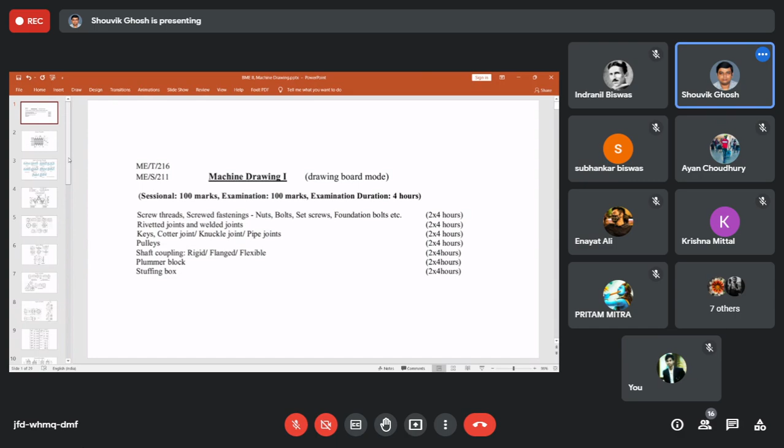So in our joints topic, as you can see, we have riveted joints and welded joints initially. Afterwards, we learn about keys and how keys are used to make a cotter joint, knuckle joint, and finally we have pipe joints. Okay, so we'll begin with riveted joints today.

So as you can see, in a riveted joint, as most of you might have seen while crossing the Howrah Bridge or any bridge that is prepared by using riveted joints, you will see that on both sides of the metallic sheet or the metallic plate, you will find round shaped bolts that are present. How these bolts are made is the process called riveting. Okay, the bolts look like this, with a round head on one side and a shank.

Now you can see on the right hand side face how the rivet is made. You can see this round cup like die. It is pressed using a high amount of force on the other side of the shank, such that the metal deforms and creates a cup like structure or the half cylindrical structure on the other side as well. So both the sides are sealed with a single piece of metal having a cylindrical structure at the center and two semi spherical structures on both the ends. Okay.

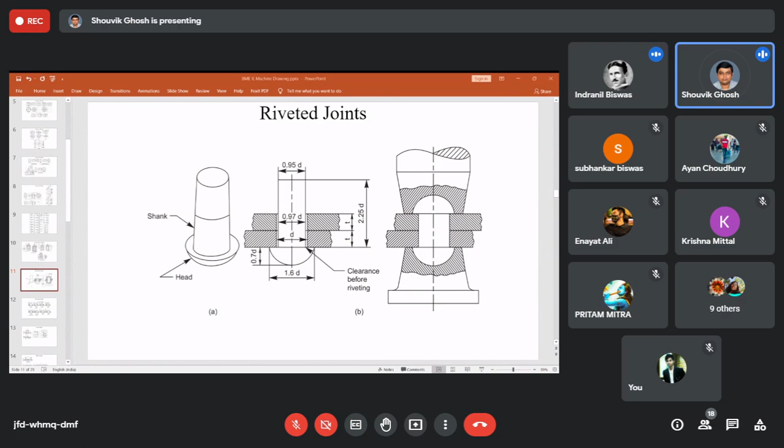All these have different utilization in industries. In most of the cases, you will see that the cylindrical portion is similar to each other, only the actual head is different in size, and based on that the naming of the type of the rivet is kept.

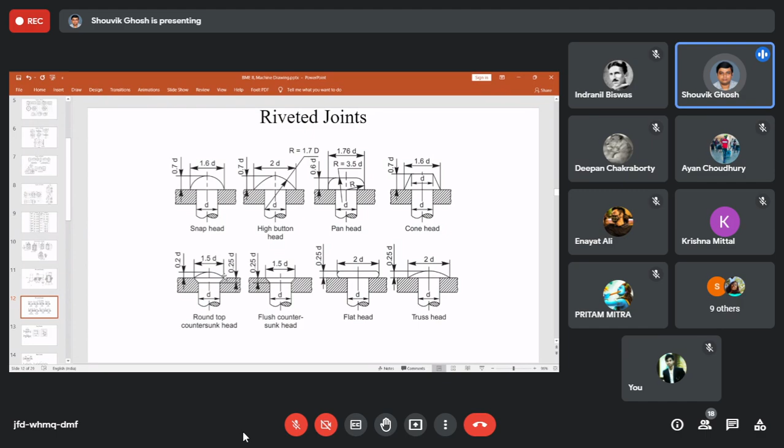In some cases, you can see countersunk head. It is somewhat within the material. An angular structure is present, and within that structure also some amount of riveting material is present, where apart from the cylindrical structure, the angular portion of this particular countersunk head helps in carrying the load or stresses present on the rivet.

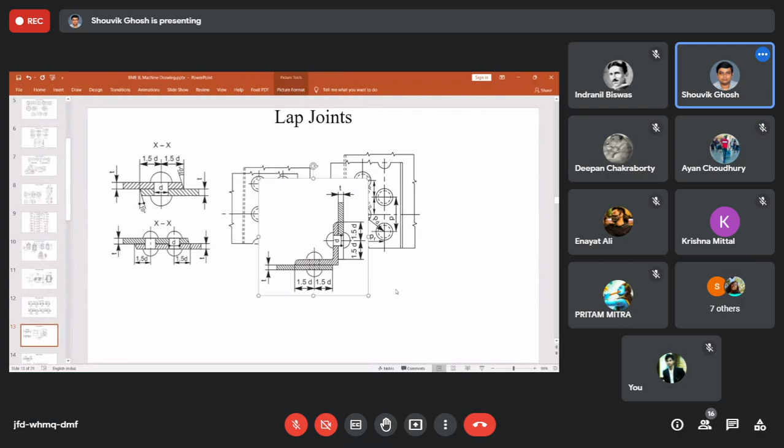Angle means, what we can say, this one. You have done I beam, L beam, T beam, right? So the corner of that, this is the I beam or whatever T beam. If the T beam is attached using riveted joint by overlapping, then this particular type of joint is called angle

joint. Okay, this particular joint is called angle joint, where a particular beam is used to attach two separate sheets of metal at 90° to each other. So that is the lap joint. Okay.

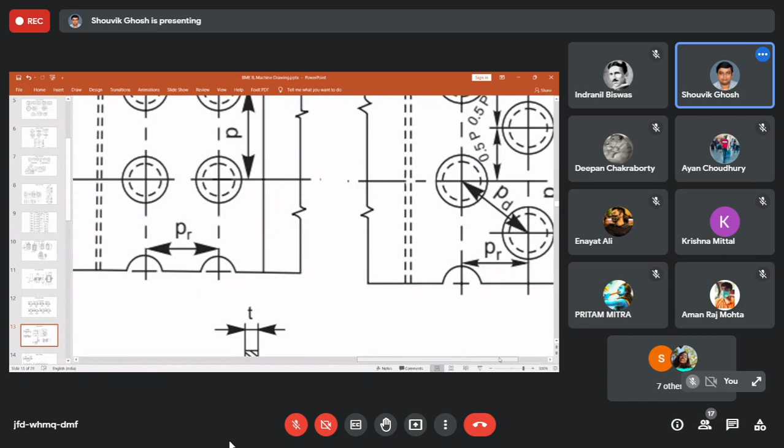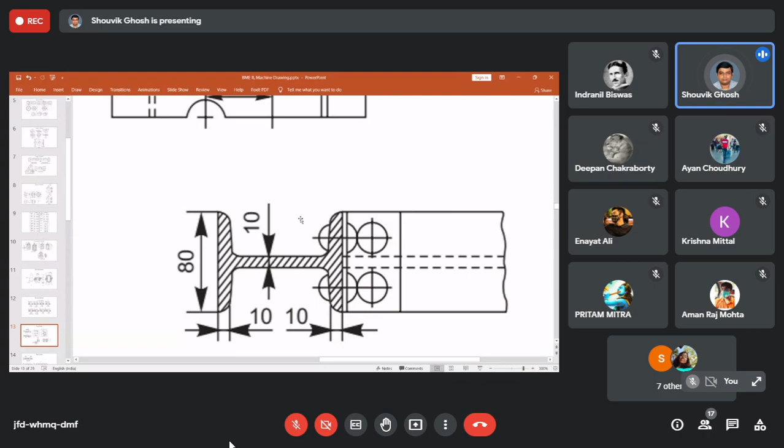This is the column or beam joint that you see in most of the bridges or any other fixtures. Next is butt joint. Butt joint comes from the term where two ends of a metal sheet are joined together using another strap of metal.

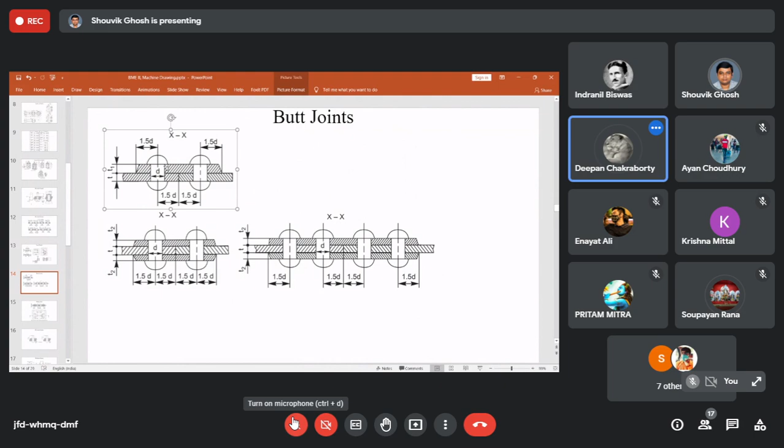So this particular figure on the left hand top side, these two metal sheets at the bottom are two ends of two separate metal sheets. You can see a cut in the middle, and the difference in hatching line angle indicates that these are two separate sheets of metal. So these two sheets are joined with the help of another strap of metal sheet into a single sheet of metal. This is called a single strap butt joint.

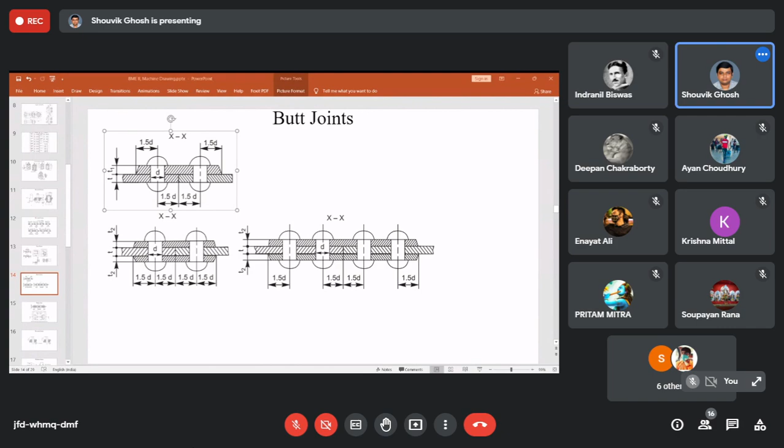Single strap butt joint. If there are two sets of metal pieces used, one on the top, one on the bottom, that means two ends of two separate metal sheets are joined using two separate straps of metal, then it is called double strap butt joint. Clear? Yes. Yes, sir. Okay.

Again, you can see a figure on this side. There are two sets of metal sheets, two sets of straps, two sets of rivets, two sets of joints. You can see two sets on the left, two sets on the right. This is double strap, double riveted butt joint. Okay. Do you want me to write the names?

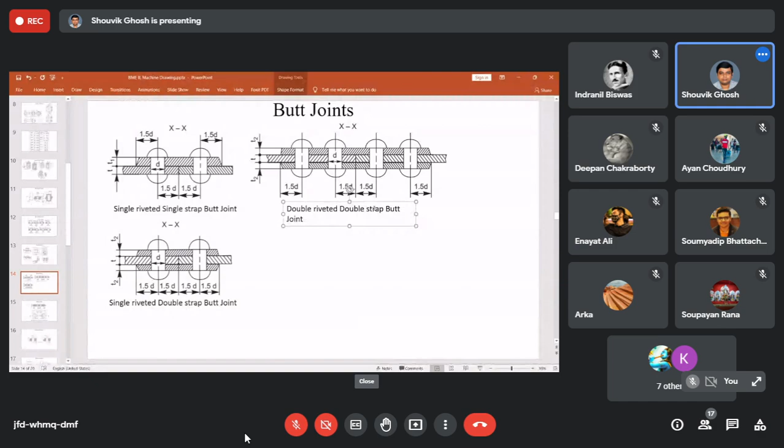Single riveted single strap butt joint. Yes. So single riveted single strap butt joint, single riveted double strap butt joint, double riveted double strap butt joint. Okay, so these are the three types of butt joint.

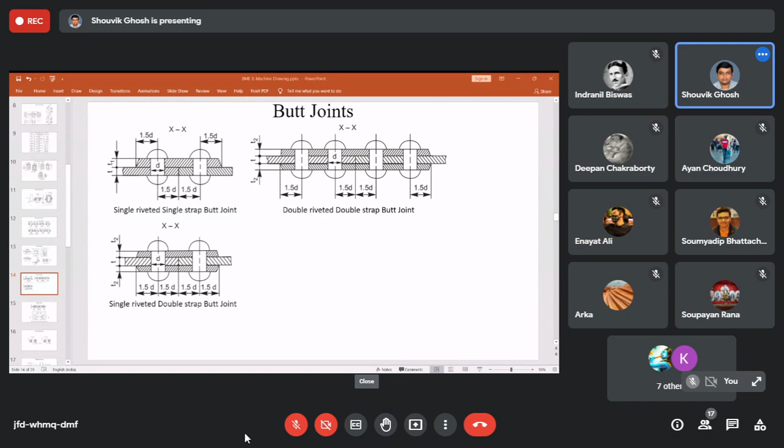This, since তোমরা মেকানিক্যাল থেকে, I expect you can tell me a difference between these two. These two are similar images, but what is the difference? Can anyone tell me?

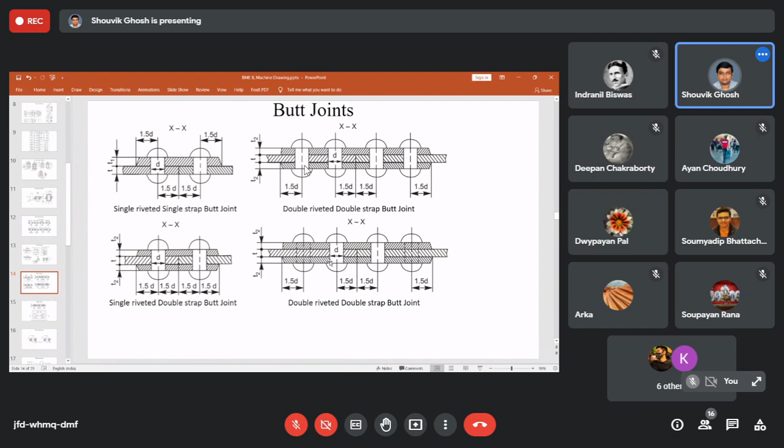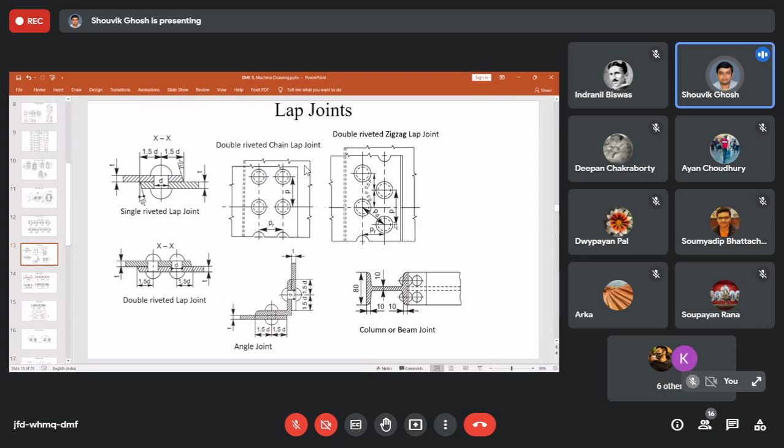It is zigzag pattern, not chain pattern. Only with zigzag, at a certain section we can only have one set of riveted joint; another set will be hidden behind it, right? So this one is double riveted double strap chain butt joint, and this one is zigzag.

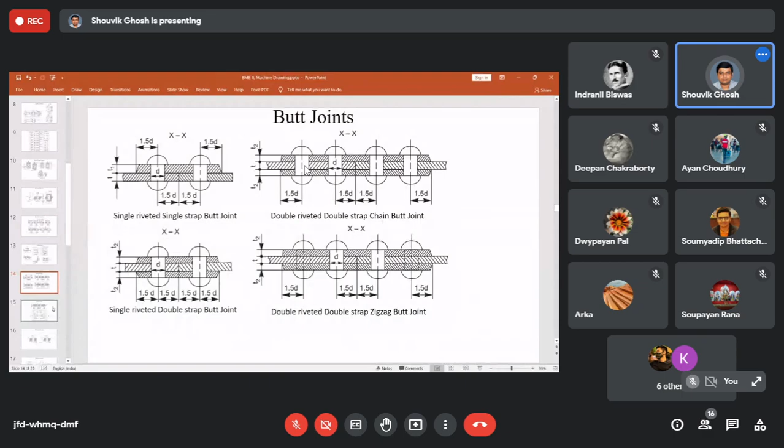So these are the different types of butt joint. You can see the double riveted double strap zigzag butt joint from the top, how it looks. So basically the cross section is shown here, and it looks like this. Okay, so got the different types of joints, lap joint and butt joint. What are the different types?

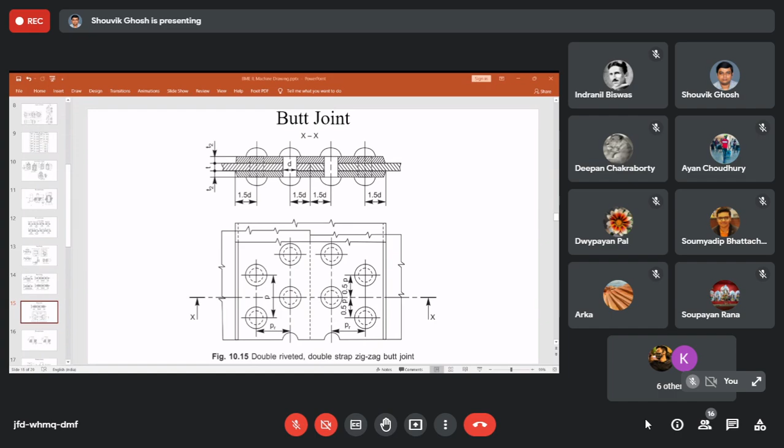Can anybody tell me what this is? Fullering and caulking.

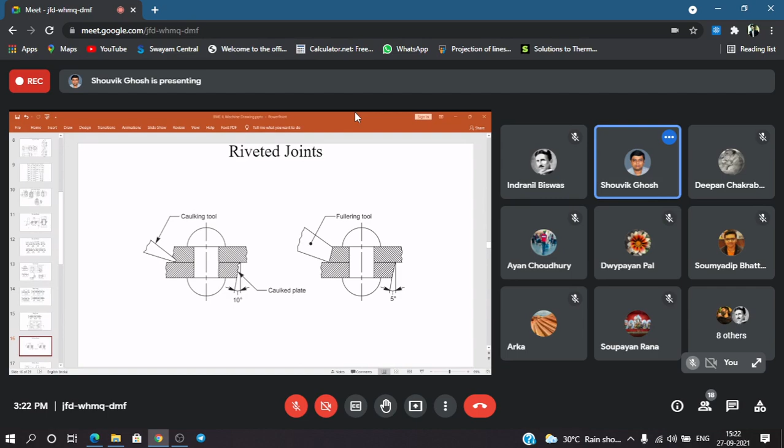tools. This particular set of tools are used so that the beveled edges are hammered, and using the blunt edges we do this hammering so that the joints can be made airtight. Okay.

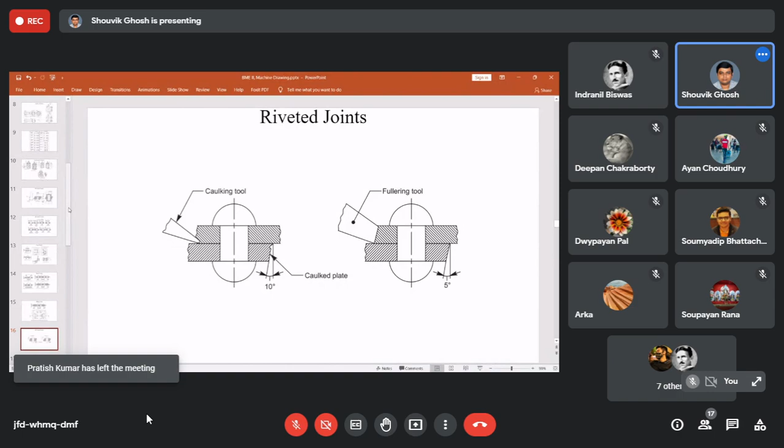So these are the different things about riveted joint, and within riveted joint the lap joint and butt joint. Next we'll go into welded joint. As you can see, in welded joint there are different scenarios where welding takes place. It can be on the angle, or only filling up between two metal pieces.

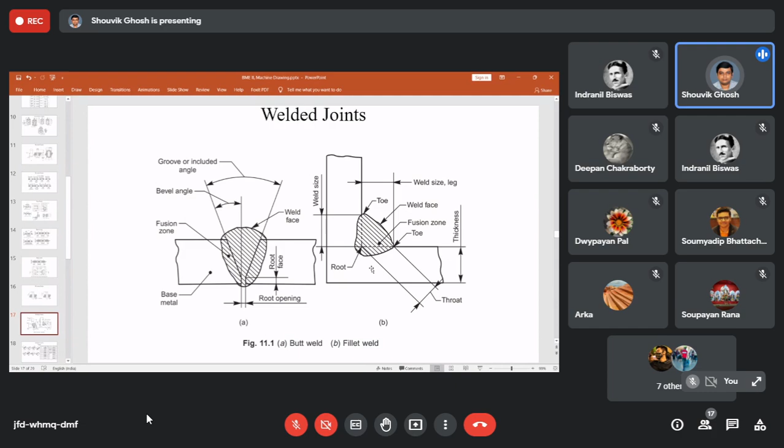Okay, so these are the different types of welding joints that are done. As you can see, these are different types of welding joint, and for which type of welding joint, how the material sheets are present, all are given here.

And from this particular set of illustrations, you can have a better understanding of which form of weld is to be done based on the symbol, as you can see over here. So initially we have the lap joint, that is overlapping of two metal sheets.

So this corner, when it is welded by overlapping of two metal sheets, it is a lap joint. Then we have the butt joint that we have already seen. Then we have a T joint, when a sheet of metal is placed perpendicularly on another sheet of metal.

Then we have the corner joint, that is two metal sheets placed on one another and the corner is welded. Then it is the corner joint. We have the fillet joint. We have seen currently, we have the fillet joint where the corner of two metal sheets is done.

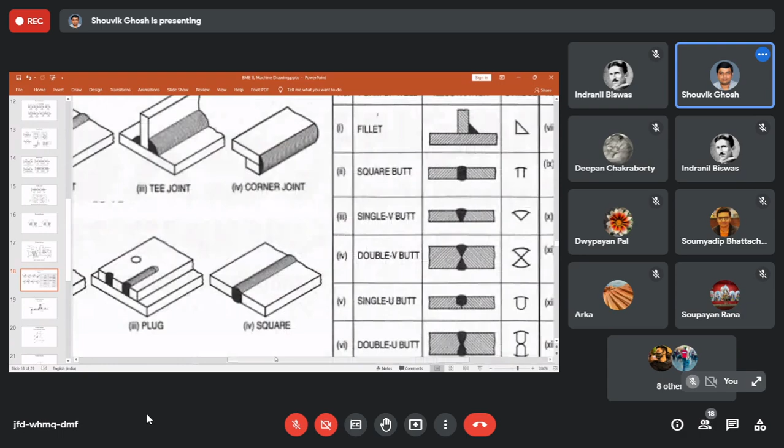Then we have a square joint. Square joint means all throughout the thickness of the material is welded. As you can see from this particular table, let me zoom in. You can see the symbol of fillet is a 90-degree triangle, indicating that it is the corner of the perpendicularly placed metal on one another.

Okay, square butt joint, that is the whole area or the square is formed by the welding material, is given by a symbol nearly represented as a pi. You can see it looks more or less like a pi. Then we have the V butt joint, that is the by default butt joint that we can see.

And if it is done on both the sides, if the material is much thicker, then double V butt joint, that means same type of welding is done on both the sides, considering the half thickness of the material is the midpoint.

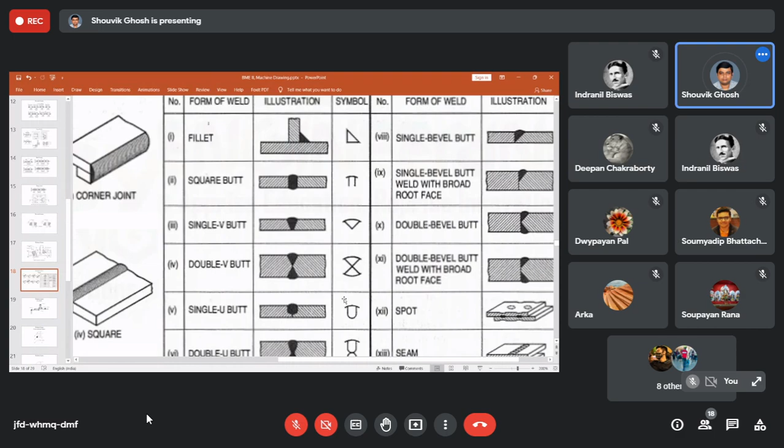Okay, then U shaped butt joint, where the corner or the end of the material is cut and welding is placed on that cut, so it looks like a U with a line over it. This is a double U butt joint, similar setup as double V butt joint. Okay, this is a single bevel butt joint.

Bevel means one material is at 90 degree and the other one is angular in nature. So single bevel butt joint. You can get an idea from the symbol that the amount of weld required in the cross section is nearly similar to the symbol of the type of weld that we are talking about.

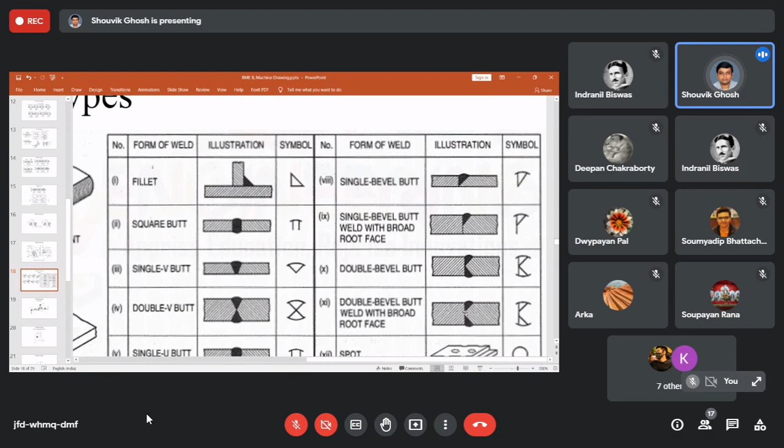Then we have the single bevel butt weld with broad root face, and an extended portion is present over here. So a line is added to the symbol to represent that. Okay. This is a double bevel butt joint, as you can see. Double bevel butt weld with broad root face, where additional root face is present, that the gap or the root amount is increased.

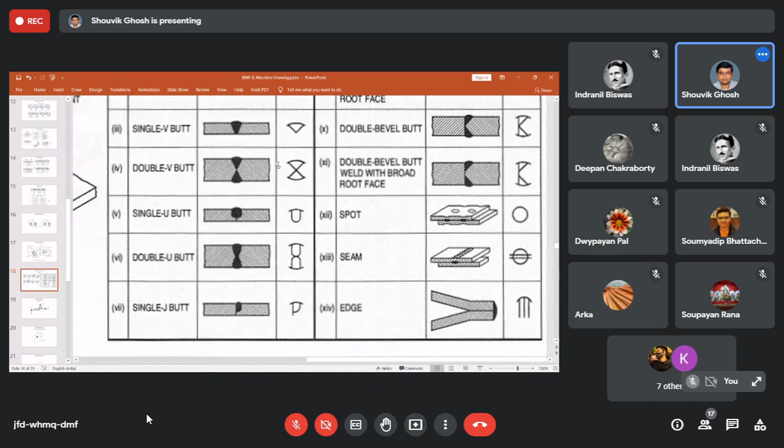This is a spot welding. Spot welding means some welding in between spots. Then seam welding, that is joining two metal sheets using seam welding. And then edge, you can see edge we have already seen over here in this particular figure, corner or edge. Similar type of joint is the edge welding. Okay, so these are the different types of welding joints.

This butt joint present on the opposite side is the double butt. If the shape is V, then it is double V. If U, then it is a U butt joint. If it is V, V butt joint. Double sided means double V butt joint or double U butt joint. So like that. Okay.

Okay, sir. Yes, sir. Achha.

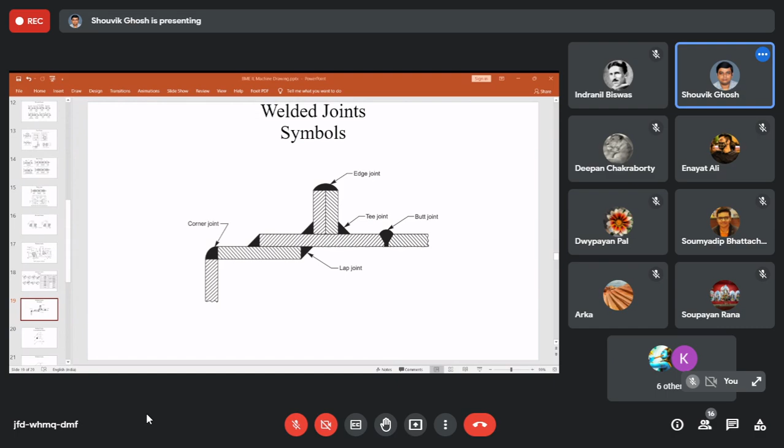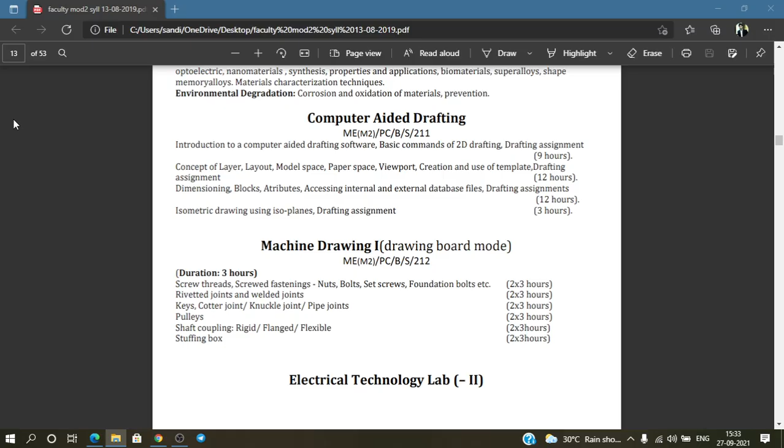Page 163. I think I have shared the book PDF with you guys. Let me check once in your classroom. Yes, I've shared the PDF book with you. In that book, if you go to page number 163, a set of welding symbols are given. Okay, so go through all of them,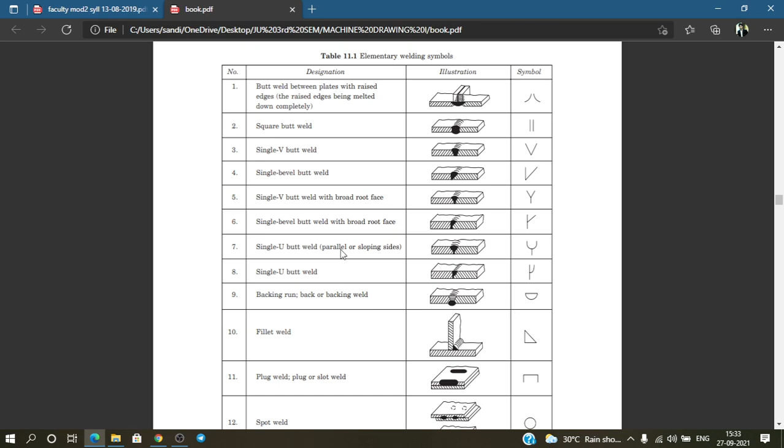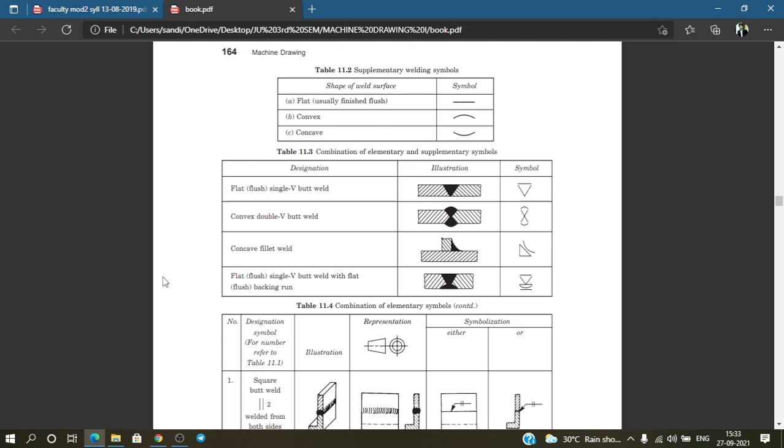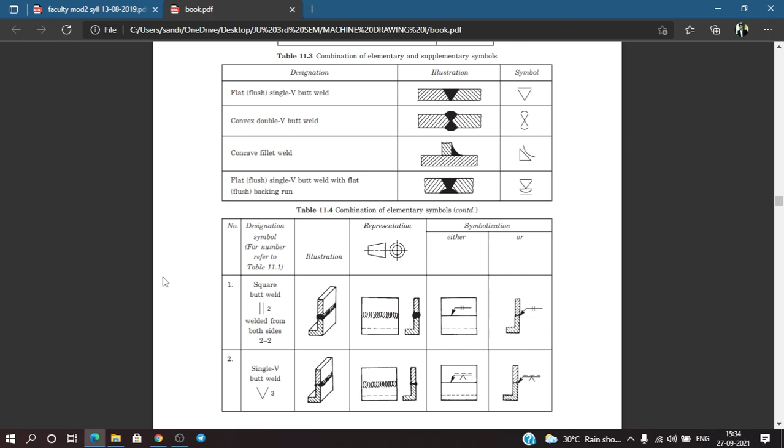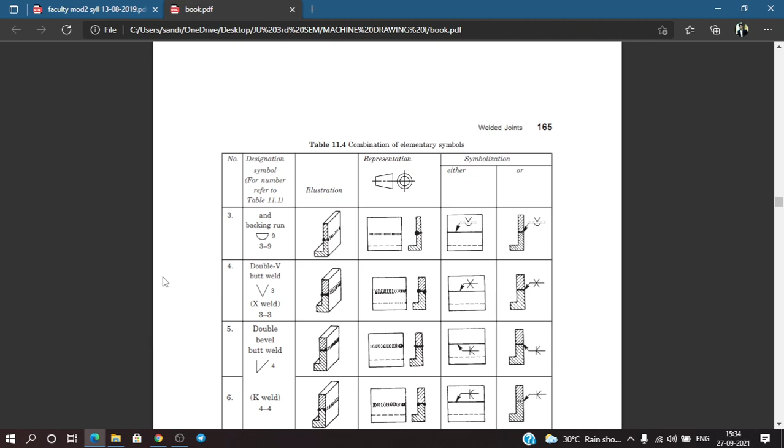and along with that, on page number 164, the type of welding joint is elaborately given along with the definitions and the symbol, the way it is illustrated and represented, and how it is symbolized. Symbolized means when you are working as a designer, there are certain symbols like we have seen already over here. So how the symbols are represented in the images so that the manufacturer can follow those symbols and do the correct type of welding in those parts.

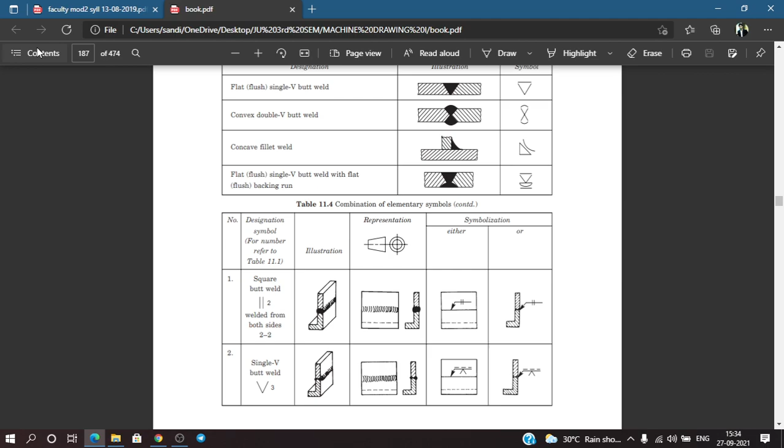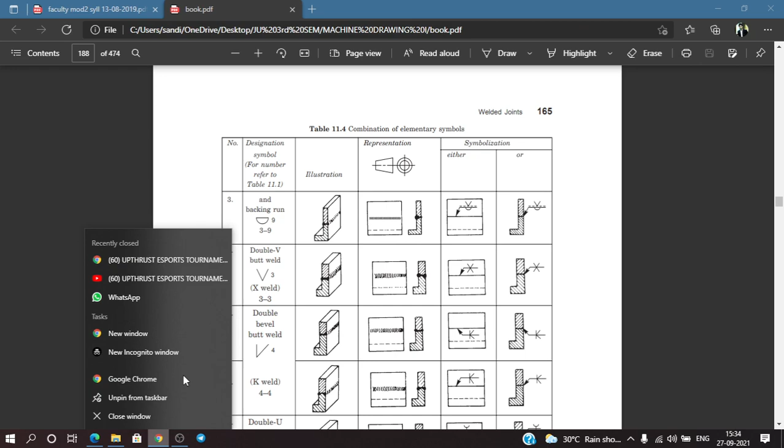Okay, so from page 163, what are the different symbols and what are the different ways to show the symbols in the figure is given. Okay, here you can see the welding conventions. These are the welding conventions where it indicates how the welder should weld or continue with the weld.

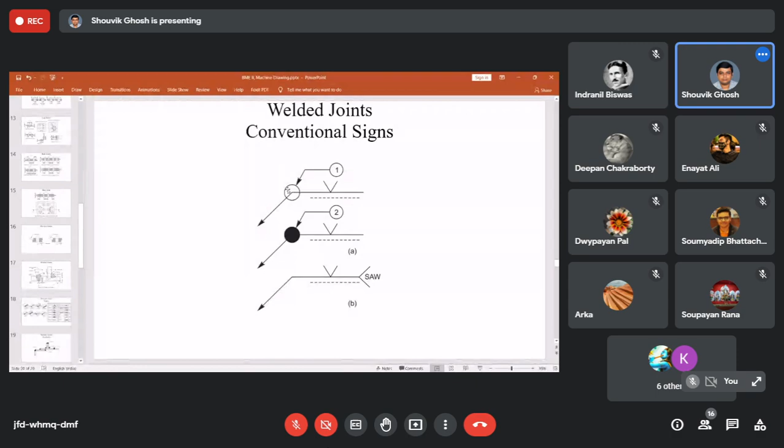The first one, number one sign, you can see a hollow or a clear circle is drawn. That clear circle indicates, or the arrow indicates, that the welding should be all around.

Okay, the welding should be all around the area where this particular arrow is pointing to. Point 2 indicates that with this dark, filled circular pattern, the welding joint is to be done on site, not all around. Okay.

And the last one that you can see, SAW, that stands for submerged arc welding. Submerged arc welding, SAW. Okay.

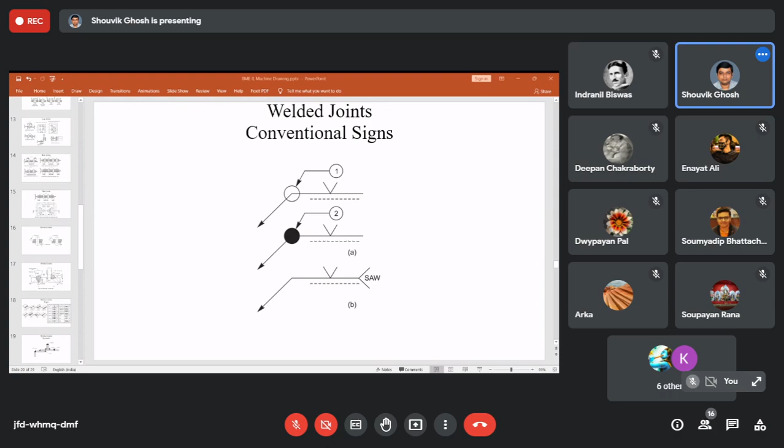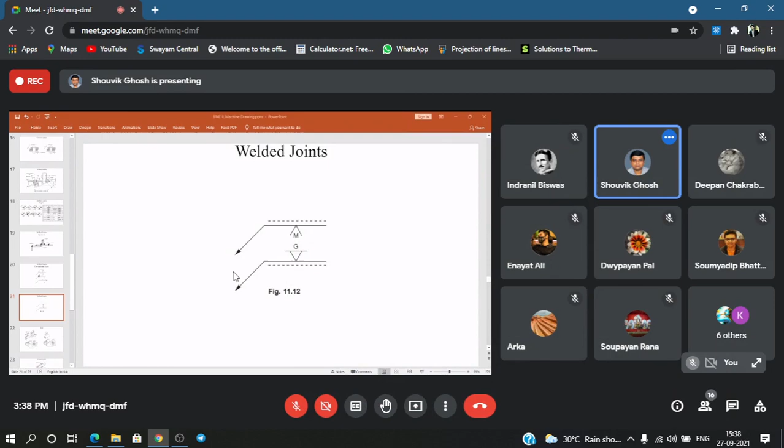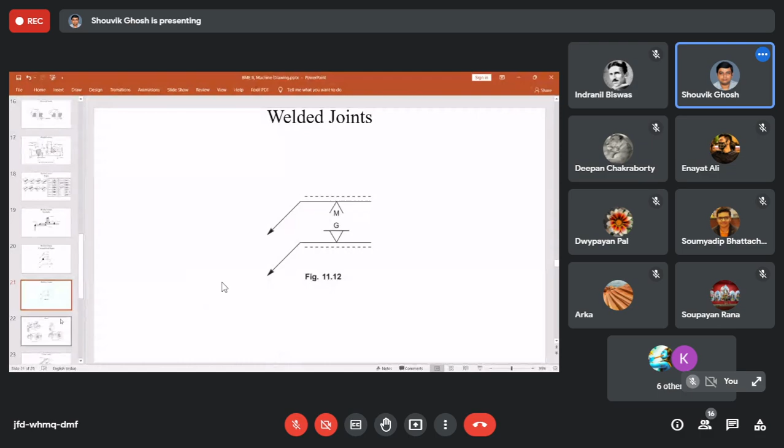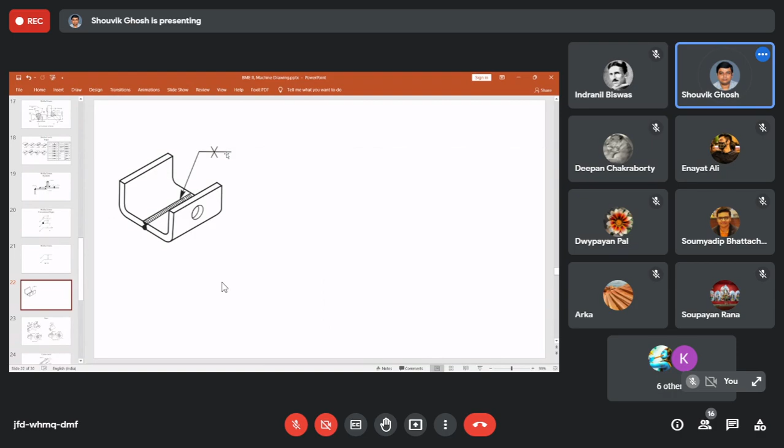So suppose, let me give you one example. This particular weld. As you can see, the symbol indicates two identical V's. So from that we can understand that it will be a double V butt joint. So you get the idea how the symbol is shown. This symbol indicates a double V butt joint.

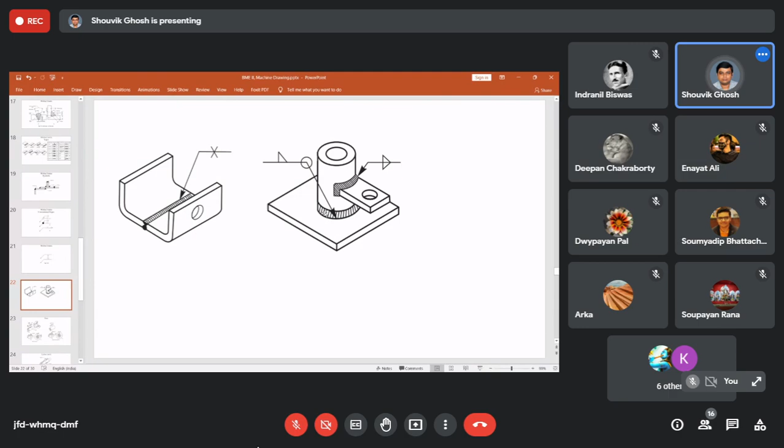Similarly, suppose this one. As you can see, this is a cylindrical structure placed perpendicularly on this sheet of metal. The circle is given, so it indicates that all around the corner the welding is to be done, and this triangle indicates that it should be a fillet form of weld. So a fillet welding all around.

Again, you can see two triangles. So that indicates that this additional sheet placed on this cylindrical edge is to be double filleted, and it is not marked all around, because it doesn't go all around. Only some portion of this material is going to get attached, so double filleting it will strengthen the position of this piece of metal. Clear?

Again, say one or two types are given only. Let's take a direct example. I think this one will be. So this is another one. You can see from this underlying indication that it will be a single J butt, as given over here. So a single J butt is to be done on this particular piece of metal, not a fillet weld.

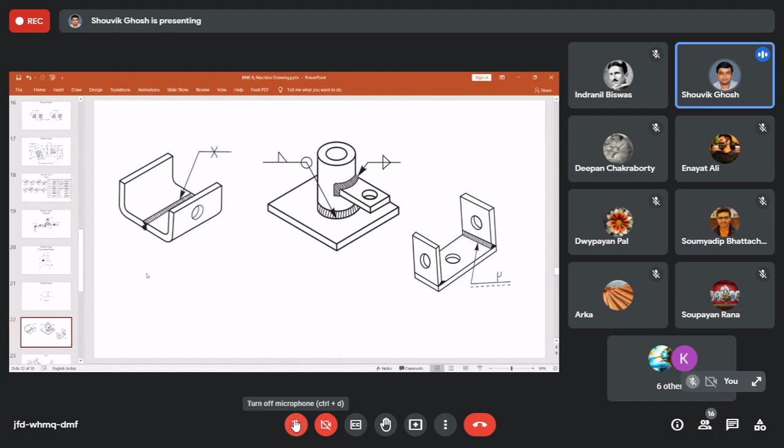I will give you two sets of questions for the reports. Report number one for the screw fastener, and number two for the riveted and welded joint. Now, if a question is on the different types of riveted or welded joints, you don't need to draw all these figures. You will draw a table.

Even the table given in 163, 164, you can remove some of the columns; only the name of the form of welding along with the illustration and the symbol is required. But all of them should be there, and the drawing should be neat and clean. You should not draw a straight line freehand, and it should not be wavy. Use a scale and draw a simple straight line. That's all. Okay.